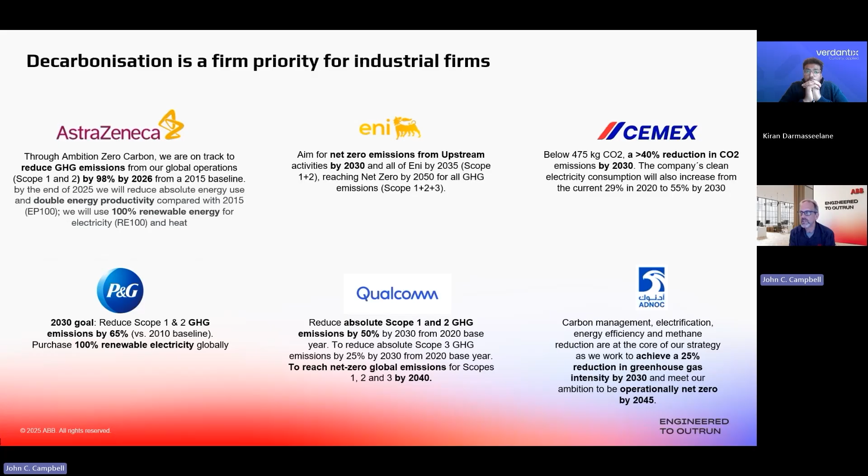I like the idea of working with fast movers because with our solutions, which are software solutions, they're easy to implement as opposed to making capital expenditure changes to your processes. So I feel like there's two different ways. So if you want the quick hit, you want to do something with software to help you achieve these goals. And so seeing people that are fast movers is always kind of interesting to me.

Thank you. Yeah, I guess we kind of just touched on this point here, but one of the big reasons we're seeing a lot of these claims on emissions reductions and energy targets over the next couple of years is because of regulations and the impact that has on brand reputation. If we're talking about things like climate goals and regulations, I mentioned the Paris agreements, but we've also got things like the EU Fit for 55, the US Inflation Reduction Act, which is incentivizing US firms to invest in clean energy and efficiency improvement capabilities.

On the other side, like I said, sustainability, carbon reporting activities around TCFD, CSRD, SEC, etc. All these things are making the idea of decarbonization and carbon reductions more like a mandatory thing rather than just the traditional voluntary reporting side that we've seen in the past. And what that really talks to is this idea that decarbonization today is no longer just an optional thing. It's something that firms have to do, or you're going to be hit with huge fines, reputational damage, and you're going to really fall behind compared to the rest of the competition in the market.

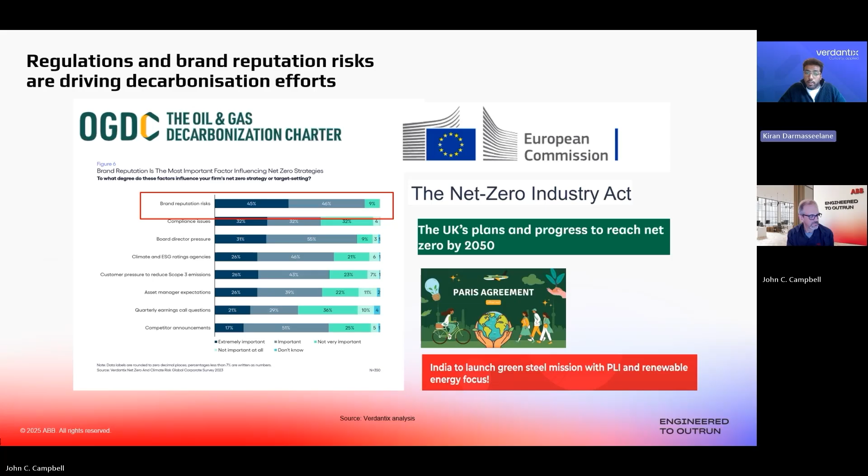But it's not just we're seeing this from a market point of view in terms of what governments are saying, regulations are saying. It's also from an investment point of view. So for those not too familiar with Verdantix, at the start of this year, start of 2025, we went out and interviewed 304 industrial executives across operations and maintenance roles to really understand their technology preferences, budgets, and priorities.

When we questioned them about their digital transformation plans for the year ahead, we saw that decarbonization targets was the most significant factor in driving digital transformation for their plants. While almost 50% of firms were actually looking to increase investment in decarbonization to support plant operations over the next 12 months. Really seeing there that decarbonization initiatives are top of mind from an investment point of view for industrial firms today.

Yeah, I noticed that the corporate decarbonization targets and the cost reduction and efficiency improvements roughly have the same pull from the customers. They're rated about the same. How related are these two drivers? Yeah, good question, John. And maybe should have put a red box over the first two rather than just the first one. But I'd say decarbonization and cost reduction are heavily linked for sure, especially from an industrial point of view. And we'll probably get onto this a bit more in a couple of slides in terms of what we mean by decarbonization and how the traditional role of operations and maintenance has changed over the last few years.

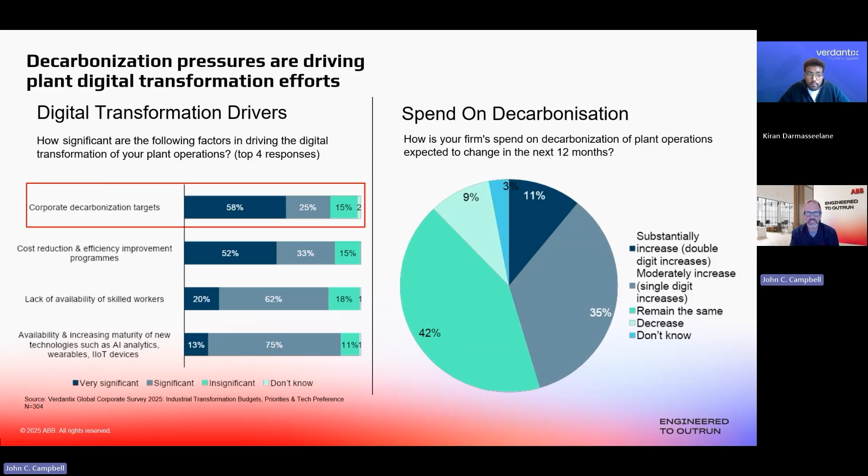It's a good question, because there's a lot of uncertainty in the market right now. I'd say what you would need to do is focus initiatives to be more than just for compliance reasons. Things like advanced control optimization projects deliver significant cost savings, yield gains, and improve reliability for firms.

So it's kind of making sure that what you're doing is not just about brand reputation or compliance needs, but about improving your efficiencies, doing more with less, achieving the overall strategic goals of the company. And that's a huge part of where you've got to go with these sort of investment decisions, for sure.

I think the other side of it is also thinking about it from a people point of view. What we're seeing is that even though there's so much political regulation coming in that's influencing the C-suite and your leaders, there's a lot happening on the front line for operations and maintenance managers that is changing what they do day to day, and that's influencing the overall investment side.

So if you take something like your traditional process optimization goals, historically you're focused on optimizing production, improving efficiencies, and didn't really have a focus on anything other than that. But now, more recently, you've got to consider reducing energy consumption, reducing waste and emissions, implementing some sort of sustainable practice, maybe integrating renewable energy into your process. It's widened the scope of what you look for when you talk about process optimization.

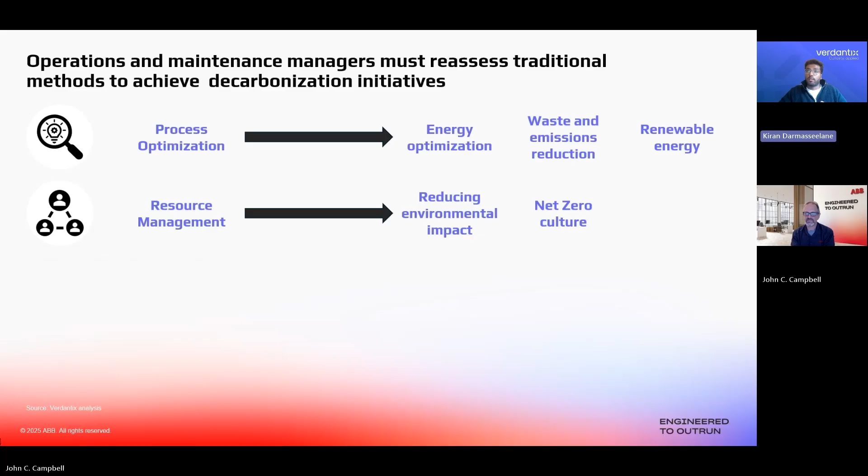And it's a similar thing for resource management, where it's no longer just focusing on managing the personnel, labor, equipment, materials from a cost point of view, but also looking at how that impacts the environmental side of things. Is there a more environmentally friendly way to procure some of your spare parts and assets? How can you drive a more net zero based culture for the business?

And it's a similar idea on the maintenance side. You're not just optimizing your maintenance workflows, but now also considering what's the environmental impact of your maintenance decisions. How are you going to mitigate risk and improve safety across the whole operations you're conducting?

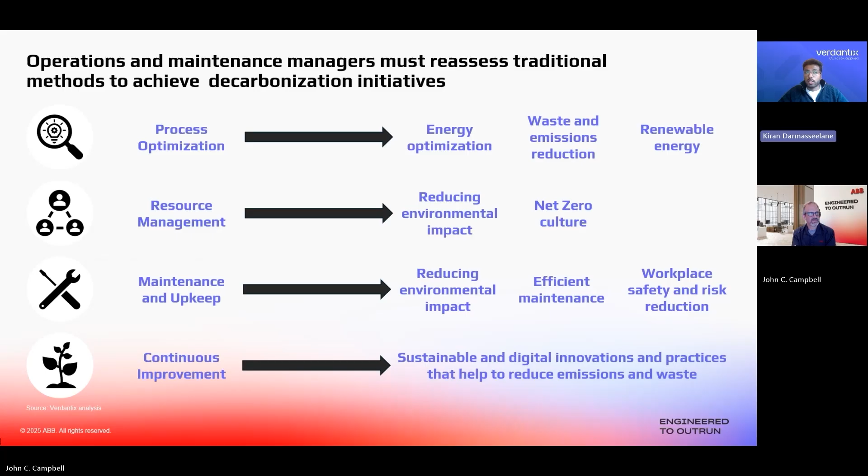And what that ultimately brings is this idea of having to continuously improve, constantly evaluate your processes and identify opportunities that help you improve performance, as well as bottom line revenues, emission reductions, waste reductions, etc. So what we're seeing at Verdantix is there are probably three key ways to achieve this. What we see in the market today is that you have three types of decarbonizing technologies.

You've got your clean energy transition tech, which is really focused on shifting from a high carbon to a low carbon source. You've got your advanced decarbonization solutions, which are more focused on significant reductions to your carbon emissions. And then you've got your efficiency improvement technology. This is more your low-hanging fruit, often software-based investments, really focused on optimizing day-to-day energy use and reducing waste as well. When it comes to... Go on, John.

I was just going to say, I think this is interesting because what you're doing is making some of these processes more complex. And now you have more than just what I would consider a control problem. You have an optimization problem. How do I get these different processes to work together? Where should I be generating energy? Where should I be pulling energy from? That's quite a complicated optimization problem. And again, it's an easy software solution to a complicated physical problem. So yeah, it's a great point.

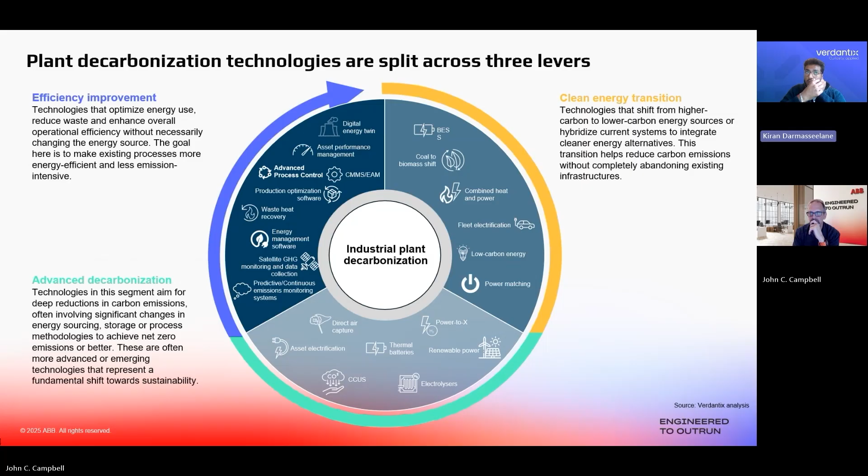I'm going to hand over to John after this slide to talk more about APC and where ABB sits into this. But looking more generally at the technology itself, we really consider APC as a fundamental technology that supports optimizing the whole plant, and that directly supports the whole decarbonization journey.

If you move up to that basic control level, you're introducing feedback loops, PID controllers. It's stabilizing the process, but you're not really optimizing anything. It's very much an efficient way to do manual control, but still having a lot of wasted resources and energy.

So go to that advanced regulatory control side, we're definitely seeing efficiency gains here. You've got your cascade, feed forward, ratio control methodologies in place now, allowing you to run closer to your desired targets, reducing fluctuations and variability in your processes, really helpful to make that energy efficiency more tight and more controlled.

But then you get to that MPC, so multivariable predictive control. That's really when you're breaking through and making significant differences in your process, able to predict the future behavior of your operations, optimize your different variables. It allows you to control your assets in a way that pushes them to their limit without exceeding thresholds, without overshooting or causing energy intensive fluctuations in your processes.

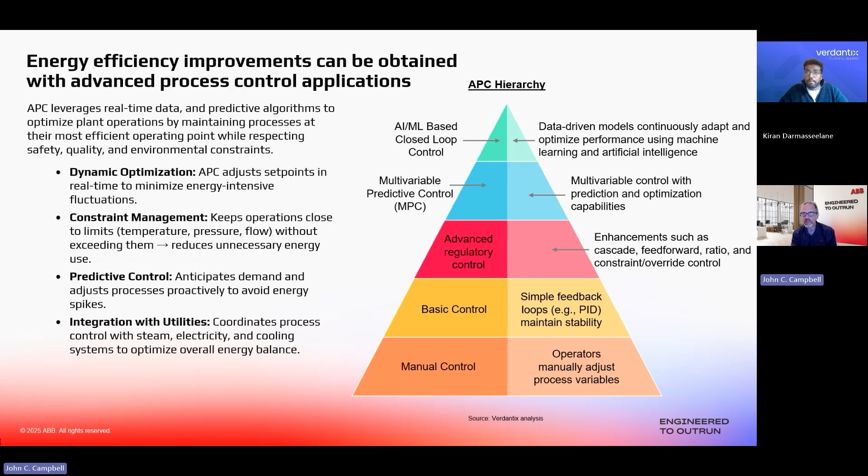Excellent. Thank you. So here's the way I like to think about this when I'm talking with customers: this energy optimization is really about three key questions. And the first one is, where are you? I don't really mean where are you in this digital journey or in the decarbonization journey. I mean, you're operating in an operating space with your processes. Do you know exactly where you are and where you are headed? And model-based technology can help you determine that.

So understanding where you are in the operating space is a very important first step, because it allows you to then ask the question, where do you want to be? Where is the money-making operating point for your process? Or if it's not about money-making, it's about decarbonization or emissions or whatever your goal is, where do you want to be to achieve those specific goals? And once you know that, a lot of value lies in the answer to that question. But the next logical question is, well, how do I get there?

I don't want to just be slamming valves around to get to some place in a very inefficient way. I want to do it in a very programmatic way. So when you think about doing optimization or advanced control, these are the three questions that you're going to use models and optimization to help you answer.

Let's step back a little bit. When we say advanced process control, what do we really mean? What are we trying to accomplish? What we're really trying to accomplish is to control the process variability.

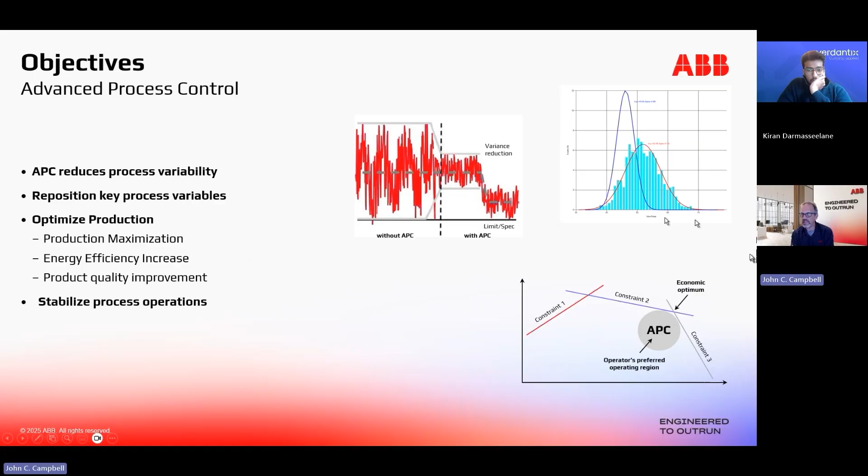So we know that it's doing that, and one of the ways it's doing that is with these models. We use linear state-space models, and state-space models are particularly good for modeling these processes because they handle the integrators and ramps, they handle disturbances, and they have a lot of mathematical characteristics that are useful for the kinds of calculations we're doing. So we will estimate where we are.

That answers the question I asked before: where are you? Given the plant inputs and the plant outputs, I can estimate where I am and where the process is headed. Given that information, I can then focus on the other two questions, which are the value questions — where do I really want to be, and how am I going to get there? I implement those control moves, and 30 seconds or a minute later, I'm asking these questions again and solving this problem again.

The state space model is very robust to model mismatches, and that's important because processes do change over time — they get fouled, or things change a little bit. So having a fairly robust modeling solution is important.

It also manages these disturbances well. We can model some of the disturbances — we know how they're going to come through the system — but some of them are unmeasured; we just have to react to them when we see them, and this modeling technology is good at that. It also manages the integrators really well, which are levels in tanks and other processes that are ever increasing and decreasing, and you need to balance that. So it's good technology for that.

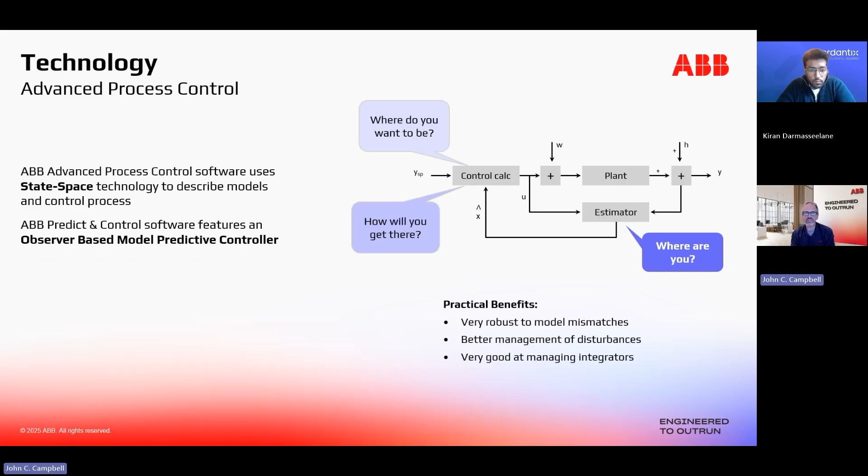We use model identification — we are not doing first principles models here, we are doing empirical modeling. So in order to generate empirical models of your specific process, we're going to step test it. We're going to move the variables in a very prescribed manner in order to get a response in the outputs. Together, this information can be used to identify step response models or state space models that tell me, when I move an input, what's going to happen to every output in the process. And then I can use optimization to control that.

So each process is unique and has its own unique quirks, and by using empirical modeling, we make sure that we have the best possible model for what you're doing.

And Kiran, you asked a little bit and talked a little bit about where AI fits in.

One of the things we've released recently is an automated step testing technology. In a way, this uses a little bit of artificial intelligence because it's looking at, well, I have a model and I know what's going on with the process, and I want to make these steps in order to get some valuable data for my identification. Can I design a step test plan in order to get that data? So we're helping our users by integrating some of that type of technology.

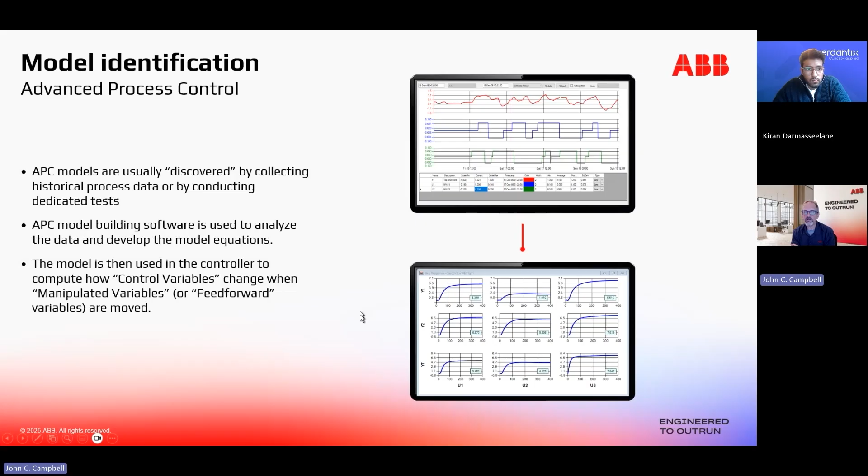Once you get your data, you're ready to go into our modeling tool. You're gonna slice out the bad data, look at the good data, and build these step response models. Once you have those models, you can set up an actual controller. The controller has a lot of configuration around economics, what constraints are important, how you want to shape how this controller is running. You can rank the things that are important to you, and by giving the optimization those kinds of parameters, it will drive the process the way you want it. Economics or constraints may change, and you can adjust accordingly.

So we have a series of little modules. We collect data for you. We have this engineering tool I've talked about. The real-time server runs this 24/7, talking through OPC to your DCS in order to control the plant. Before you implement this, you might use the offline simulator to make sure you got all the objectives and constraints correct. And we have a control performance manager that does some monitoring of how that controller is running over time, so you have a little bit of feedback.

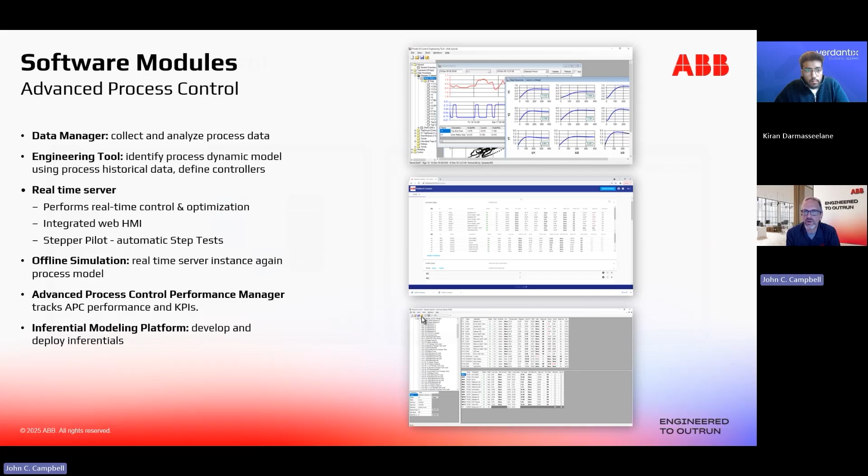So what's the day in the life of an operator like who's running one of these? I've mentioned cruise control on a car, but maybe an autopilot on a plane is a better analogy because it's a little more complicated than cruise control. Whether you're using an ABB DCS, in which case we'll build ABB DCS screens that show exactly which variables are under control, what are their set points, what are their limits.

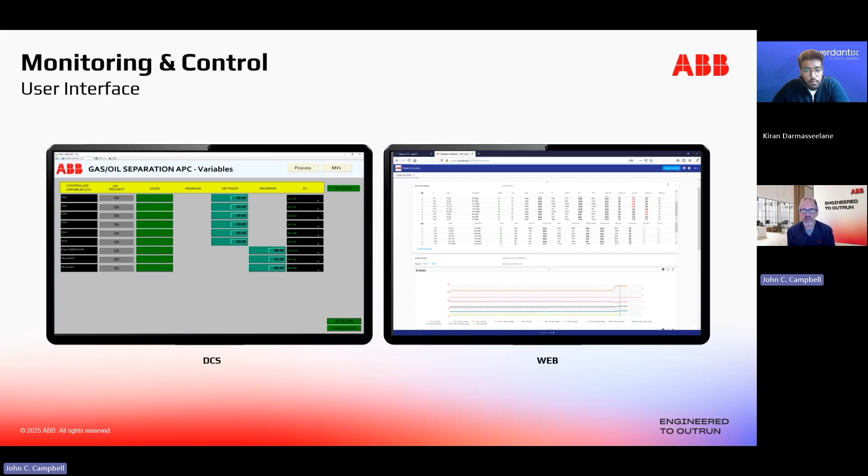If you're using a different DCS, we don't mind. You have what you have, and we can use a web-based interface to manage all of that. So the operator is really in charge of turning it on, turning it off, making sure the variables they want are enabled, and just watching how that is running over time. I like to use the analogy of the co-pilot of the autopilot of the plane, because we're not saying our software will help you with takeoff and landing. If there's an emergency, the operator is going to take control of the plant. Some piece of failed equipment, something happens, they're back in control. That's kind of the way advanced control is working.

So John, can I ask a quick question? I suppose APC has been in the market for a long time now. It's not necessarily a new solution as a concept, but at the same time you still see so many firms having obstacles when it comes to deploying it. Not many of them have used it to its full capabilities. I suppose the question is, what's changed over the last few years? Is it just things like AI making it more accessible that's making firms turn to APC more often? And on top of that, what are the big challenges we're seeing now? What's stopping that continuous adoption?

Yeah, okay, so that's a good question. You're right, what I just described we could have talked about a decade ago. It's tried and true technology, and we're really trying to lower the bar of who can be successful creating and implementing these controllers. AI is a solution for that. I talked a little bit about using AI to help with step testing. We see other opportunities to use AI to help with the modeling identification, to help with the controller design. Those are places we're actively researching.

We really don't want to wholesale replace this technology with something with an AI technology. I've seen that in the marketplace, but it gives me concern, because we have a lot of safety and tried and true technology around making sure we're moving set points correctly around the current set of advanced control products.

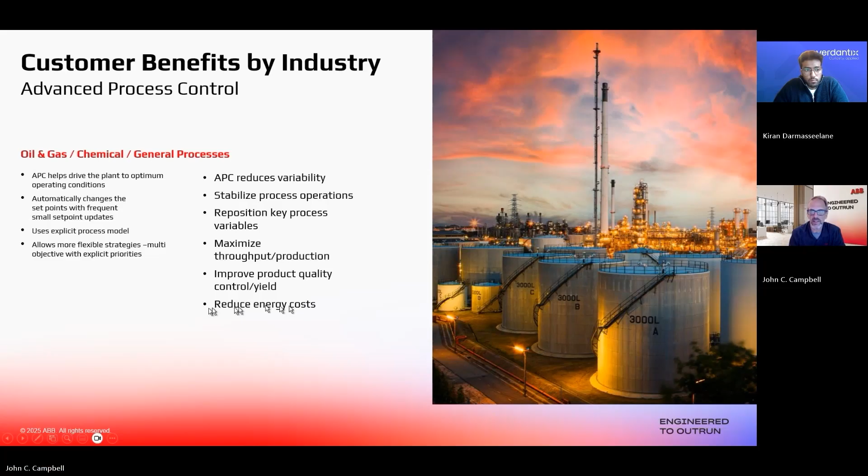I have an example here from a plant at IRPC, and you can find a success story online at ABB's website. This was a cogeneration plant. They're generating power, and they needed to manage how much energy they're using to generate that power. We were able to reduce their steam pressure variability by 50%. They are not using excess steam to generate the power that they need, and that is an immediate benefit that they saw.

That allowed them to make sure that they were generating the exact amount of power they want with the exact amount of energy needed. This is just an example of where you stabilize the process and smooth it out, and then everything else seems to run better. So this is a good example of helping them achieve their energy goals.

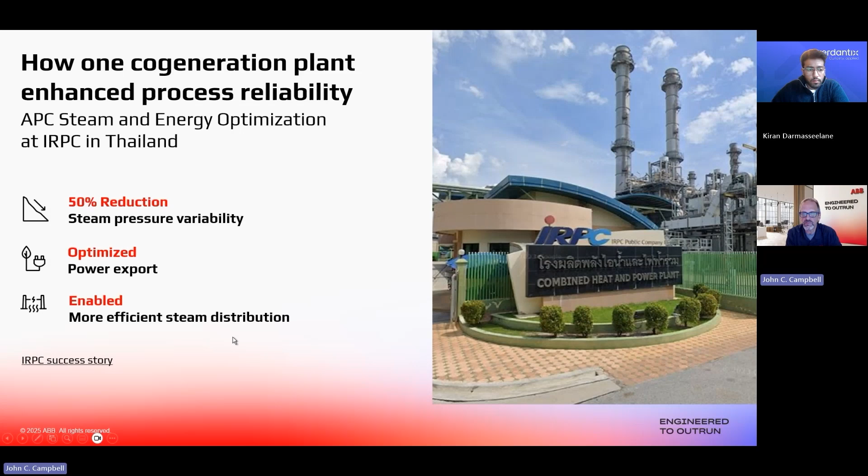This one I like as well. This is a cogeneration plant for a pulp and paper mill. Again, they're generating energy, but for a purpose on site. Again, I would point you to this website online. They were able to reduce their natural gas consumption, immediately by 4%, and they can see that in the bottom line. They can calculate their return on investment for this project.

They get to have the brag point about the CO2 reduction, because that's something they might be reporting on a quarterly basis to their shareholders. But in this article, I found it interesting that the plant manager we're quoting has another quote as well. He says, 'Sustainability is integral to our circular business model. We're taking actions to lead the transition to a low-carbon, circular economy by designing out waste, keeping materials in circulation, improving energy efficiency, investing in new technologies, and switching to renewable energy sources.'

So they have a whole series of goals, and it very much resonates with what Kiran was showing before, that customers were saying were their goals. This one, with this immediate return they're getting, allows them to think more favorably of some of their more expensive projects. They talked about switching to renewable energy solutions, and that's a capital expense they might have to spend. So this kind of project gets the momentum going on them achieving their goals, and gives them cash flow to invest in some of the other things.

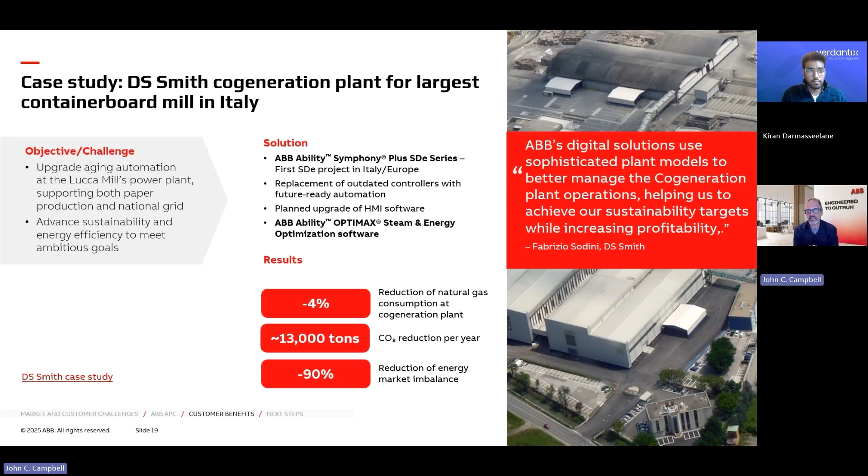That's a good first step. You can let third parties, whether that's ABB services or other services people that you like, help you with building out these controllers and optimizers. What you need is someone on site who can be the liaison to make sure they have everything they need, get a project going, get the people involved, and get moving. That's where I would often start. There's got to be some low-hanging fruit opportunity that everyone is comfortable with attacking. That's where I would start.

So I was saying that we've talked a lot about advanced process control, which is our empirical modeling for doing point optimization around different processes. When you want to optimize multiple processes and multiple pieces of equipment, you'd get into Optimax, a real-time optimization solution. We haven't talked about that as much, but it layers nicely on top of APC. So it may be that you have an overall energy monitoring and reporting problem you want to solve. Maybe Optimax is the place to start with that. That will highlight where you should be putting advanced control, where you should be putting your efforts. Maybe you just want to start at the bottom with APC on a specific process unit.

So really, this goes back to my three questions: Where are you? Where do you want to be? And how do you want to get there? Both real-time optimization and advanced control can attack that from different standpoints. So reducing energy costs, improving process stability, achieving ROI quickly so you can go on to the next project, and securing lasting performance are all things closely affiliated with APC projects.

And then I quote my buddy from DS Smith again: working with ABB has been a massive help in achieving our ambitious sustainability goals. They do have broad reaching goals, and we're just helping them hack away at them. So with that, I think we're at the end of our slides.